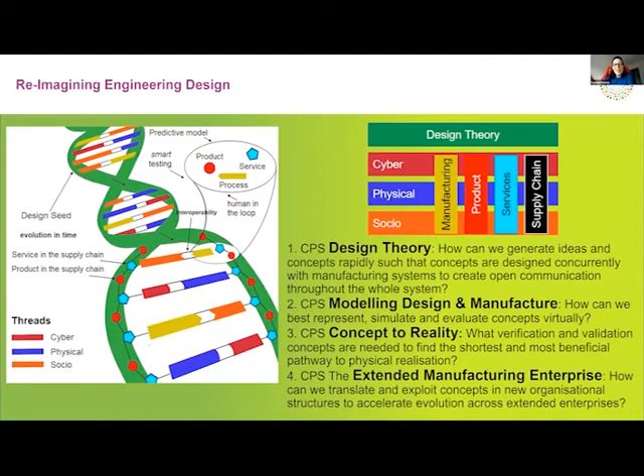So we've got four threads. One of them is the design theory that weaves everything together and carries modeling, design, manufacture, as well as physical validation from concept to reality, so the design goes hand in hand with manufacturing processes that will have to be novel, enabling new designs, new products, new systems, new services, eventually embedding everything in the extended manufacturing enterprise, not forgetting we have humans in the loop. So that's the overall picture of what we're doing, the bird's eye view, as I say.

What I brought you today is two examples of how we're going to need electronic systems and electronic devices to evolve the digital manufacturing we have in mind, to re-engineer design in the manufacturing world. The first example is work we're doing in my lab around composites manufacturing, and why we need electronic devices to assist that. The second example is work we've continued doing, and will do as part of this program grant, on automotive assembly lines in the automotive industry - the 'where is my engine' problem. I'll touch on that in a few minutes.

So the first example is on the manufacture of composites. In composites, you have a matrix, typically a polymer, and a reinforcement, typically a fiber, carbon fiber. When we make those, we encounter lots of challenges and problems. So I want to talk to you about the pixel-based heating approach to manipulate cure-induced defect and distortion.

Just to set the scene, this is in the aerospace industry, although it could also be applied to automotive, to cars, etc.

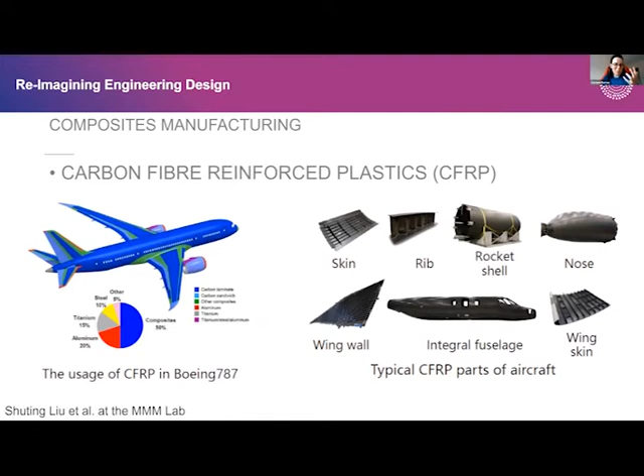So we've got an aircraft, for example - the blue areas are where composites are. As you can see, a large proportion of the body of the aircraft is composites. On your right-hand side panel, you've got typical parts of an aircraft made out of composites, the kind we're dealing with today: plastic matrices, polymeric matrices reinforced with carbon fiber. The first speaker also talked about maritime, where composites are also used. This is just to give you a picture of what we're talking about. The way they're made is quite rudimentary and hasn't changed much in the last 50 years. You lay up layer by layer - plastic, fiber, plastic, fiber, etc. You cure it, then machine it into the shape you want. Now, when curing happens, things can go pear-shaped big time, and you can find defects.

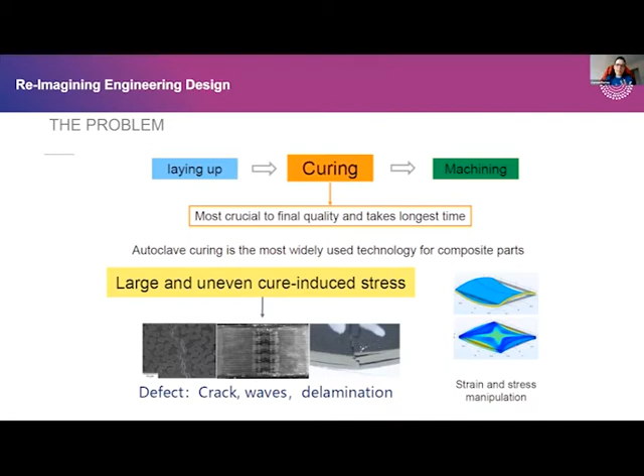You can have defects, cracks, and delamination, and the whole panel can be warped and deformed. That's not only a problem for security and safety, particularly if you're flying in that box, but it's also going to throw your design plan out the window, because things are not going to fit anymore. Things are not going to do the job they were intended to.

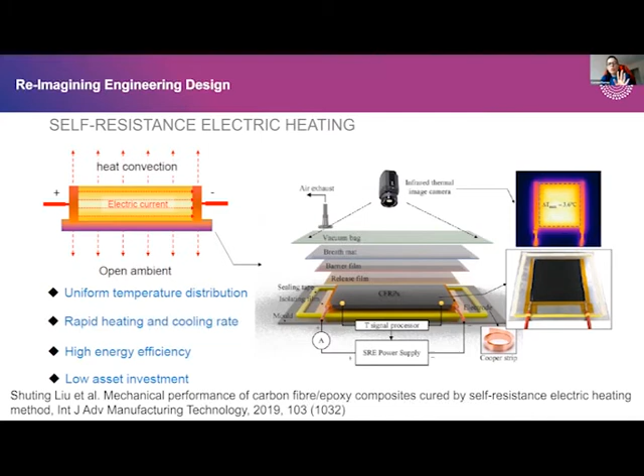So one of the things we're working on in my lab, with Shuting Liu, one of my students, is creating new manufacturing processes for controlling the curing process, so we avoid those points of deformation, warping, cracks, etc. I don't want to spend too much time on this, because the point I'm trying to make is in the next slide.

We need to control where we put the heating spot on that panel. There needs to be a way of sensing in a very harsh environment, very high temperatures, and a lot of fluid mechanics and multi-physics going on. Sensors that we can interrogate, get information from, and then react to, with a control loop to go back and manage and balance that heating profile across the entire polymer.

So, a new manufacturing process for solving a challenge in a well-established industry. However, it doesn't have the sensors we need, because there are currently no sensors that can survive in these conditions and allow us to do that control. So we are creating the manufacturing process, and at the same time, we'll have to create new sensors that are suited, that are up to that challenge.

So that's one of the needs we've got, in terms of electronic devices, electronic sensors, and control systems that allow us to realize the manufacturing process that we've thought up and dreamed of in our heads. So that's one.

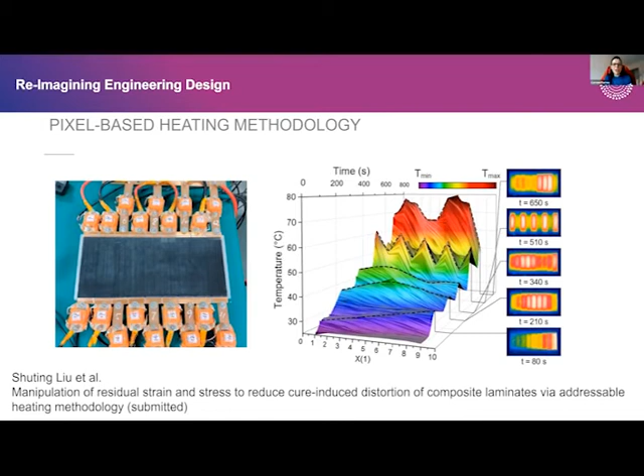That's the first example I bring you, as the need for electronic devices to help us in our manufacturing journey. The second example I wanted to show you today, a different one, is in the automotive industry, in the assembly line.

We have to remember that even though the flashy pictures we see in the news or magazines are all done with robots, there's still a lot of human intervention, a lot of humans involved in those assembly lines. So first of all, where is my engine?

We speak to multinationals, I don't want to give names, but big names, most of you are driving one of their cars. We go into their factory, and surprisingly, you'd think they have everything well controlled. They go, oh, where is my engine? Where is it? We have a warehouse full of metal parts, not just the racks, but the engine itself, a metal block of a thing.

People would say, well, you just need to connect an RFID tag to it, and you can watch it move within the warehouse and through the assembly line. Well, it's not as simple as that, because we're going to have lots of metal that creates what we understand as a Faraday cage.

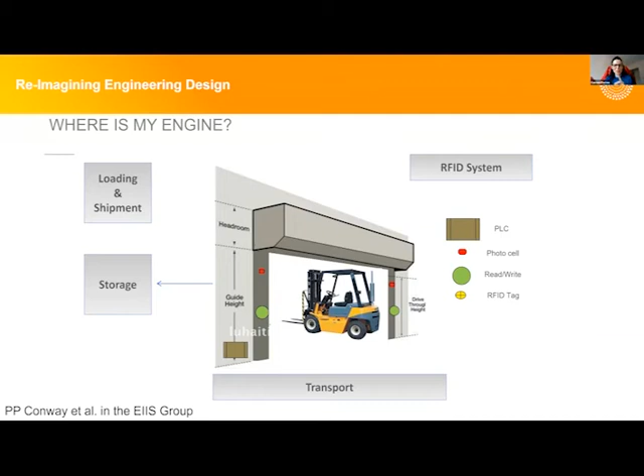Things are moving at high speed in those forklifts, and those forklifts are driven by people who have different behavior at day and at night. I'll speak a bit about that. So it's not as simple as attaching an RFID tag, because it's again a harsh environment for different reasons. The previous example was harsh because of high temperatures and pressures. Now it's harsh because of the electromagnetic field that stops us from reading and communicating with that RFID tag. It's also moving at high speed and high accelerations, as it's taking place on the forklift.

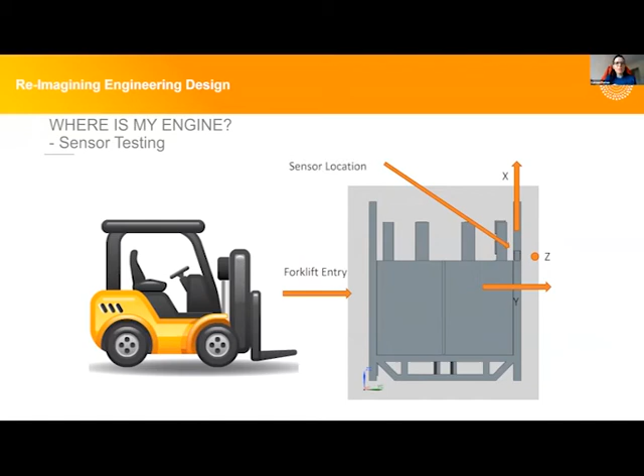And we must not forget that there is a human in the loop here, and that human component needs to be considered for this challenge.

Now let me talk a bit about this person who is kitting this engine. This person works, or is paid, by the number of engines she pushes through the assembly line. She's not paid by the number of engines that make it into the car successfully. It's not paid by the hour. It's paid by the number of engines she receives, processes, and pushes forward down the line.

So if an engine arrives with the wrong barcode or the wrong RFID card that doesn't read, or has fallen off, this person who needs to kit it, scan it, and move it on stops and thinks, right, okay, I am wasting time here. I don't know what this engine is or where it should go. So they have to make decisions under a lot of time pressure, knowing that time is ticking and another engine is coming down the line, and this one isn't being pushed down.

So they are tempted to, or fall into the temptation of, making decisions for themselves. And those decisions, in more cases than we would like, are the wrong decision.

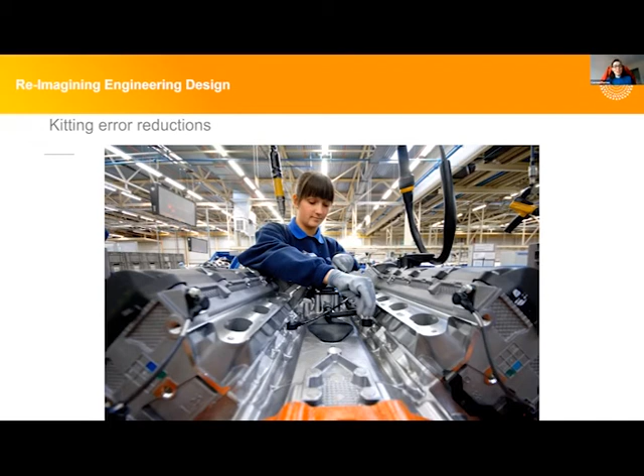For example, we've got here the blue pieces that look exactly alike when you have them in your hand. However, they're all different because they've got different tolerances. We're talking about 47, 63 micron holes.

So when either the RFID tag or the barcode is not present or is wrong, the human has to decide which one to use, and may put it in the wrong engine, or put it on the wrong tray as it's moving along the assembly line. When the wrong decision is made, these engines have to be scrapped, put in the engine graveyard. As you can imagine, that's millions and millions of pounds worth every month.

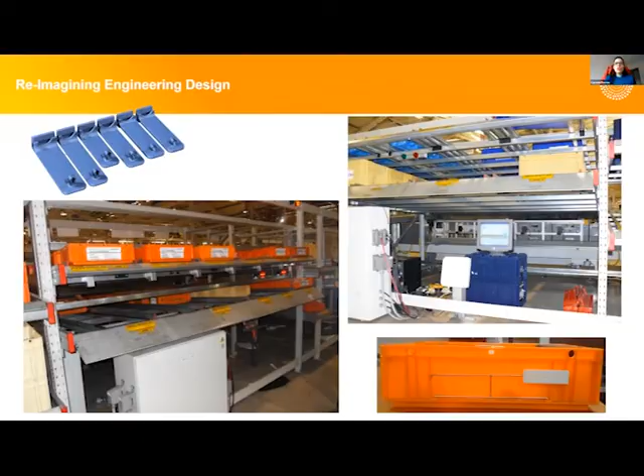So electronic devices are needed for harsh environments, i.e. heat, electromagnetic fields, or high-speed accelerations. This is almost like a wish list I've created, reflecting on these two examples I brought you. As I say, they need to be able to operate in harsh environments.

They need to be able to give us the information to manage high variability in production lines. You were talking earlier about the food industry, that's another great example of this. An assembly line, a production line, is producing different products simultaneously, so the operator needs to deal with that high variability in the production line.

Needs to enable decision making, both via data analytics - the amount of information that's there in time, accurate information, easily read, but also the quality of the data. For example, we're working on chips that process data with a partitioning that's processing on the chip directly. So instead of receiving all the raw data from the sensor, we receive data that's already filtered, which makes it much easier in terms of computational power.

And this is an obvious one, isn't it - reducing waste and wasted resources, not only time but also wasted materials, because we all need to start breathing and sipping into the circular economy. The world is a lovely place that needs to be looked after.

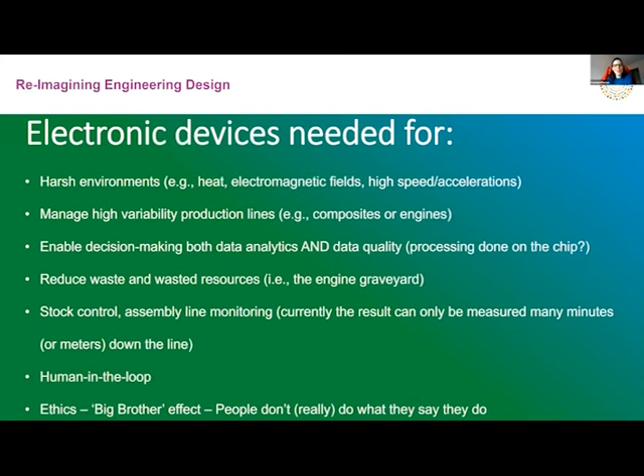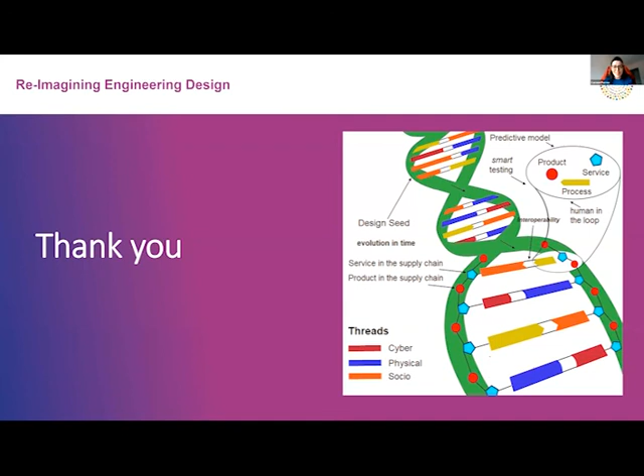And this was really a very quick show, a very quick pit stop through what we are doing in REAR, the re-engineering design or reimagining engineering design, with manufacturing and of course digital manufacturing is almost a given, and how we need electronic devices to assist us and help us evolve digital manufacturing. Thank you.